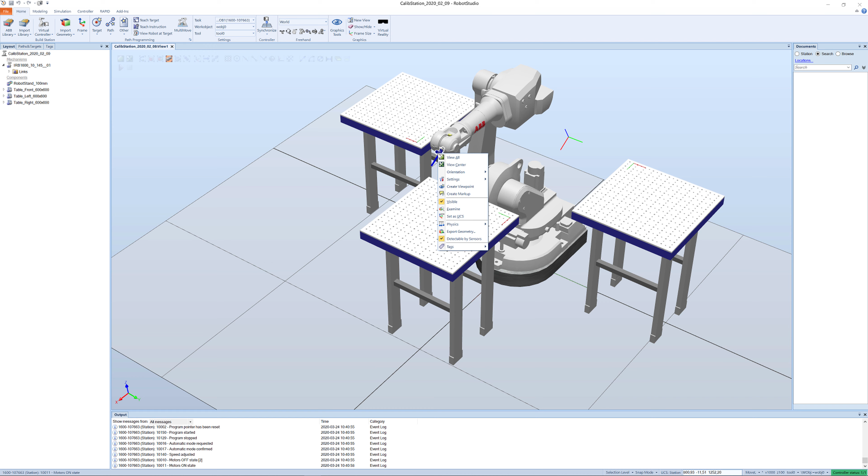Now if I click on this one, right click and choose view center and restore, the way to rotate around this is control, shift and left click to rotate around, control and left click to pan, and the middle mouse wheel to zoom up, down, in, out.

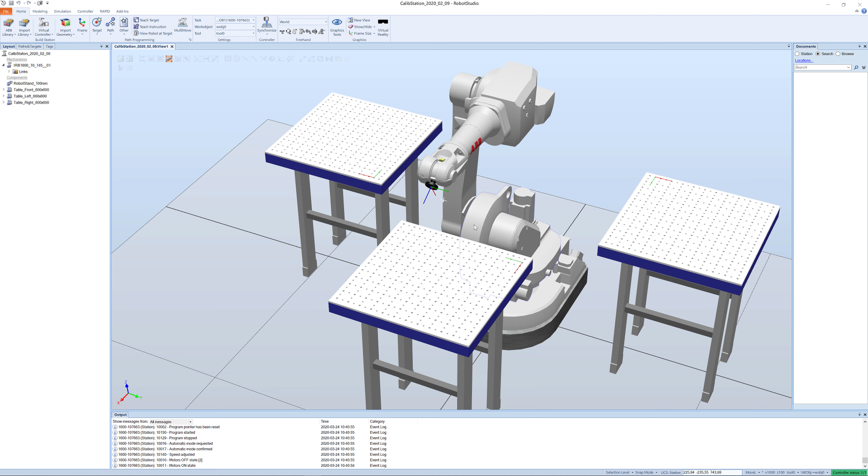So we have 3 tables. We will put a plate on this table, called table left, seen from the robot. So the robot is here, left table, front table, right table. And it has, as you see, a work object located here.

As you see, the green is Y direction, you can notice it here, and the X is red, that direction. We will place a plate at position 125 millimeters in each direction on this one.

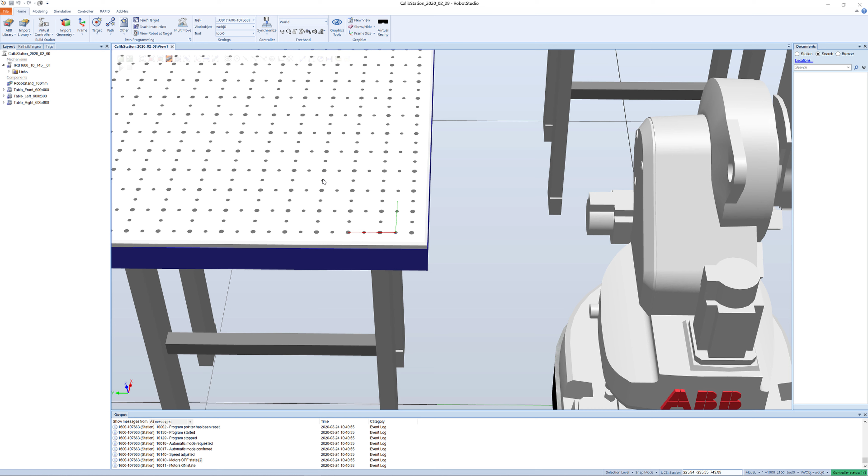So every distance here is 25 millimeters. So 25, 50, 75, 100, 125. So it will be placed at this position.

We populate the station with the other things needed, and you will have access to that and have to download it. We import library objects. In this case I browse my own library, but there will be a calib tool, looks like this one.

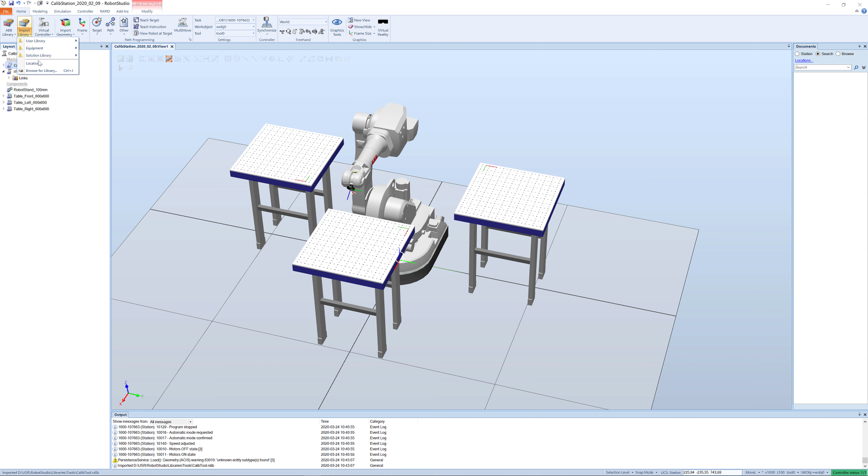And there will be a plate in the library I have here. So here it is, that one, like this.

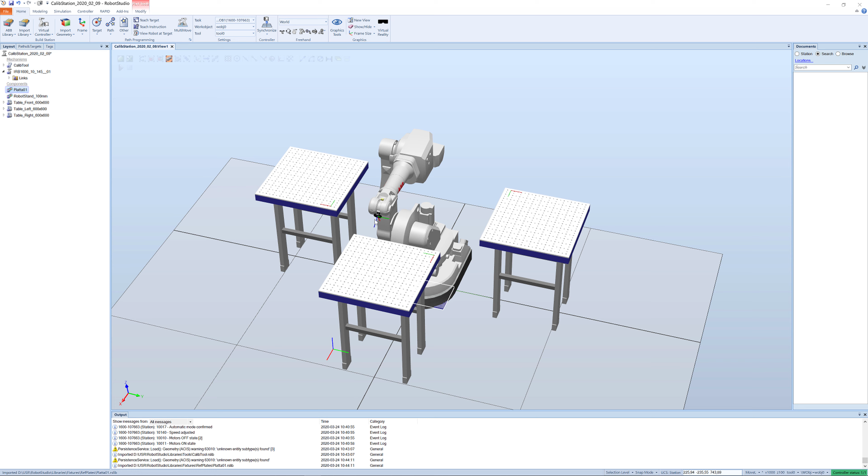Now I just place those at the proper places. So what we have to do first is put the tool at the end flange of the robot. That is done this way: we take the calib tool and drag it to the robot, like that.

And it asks, do you want to update the position of the calib tool? Yes, I would like to do that. Click out here and it will look like this.

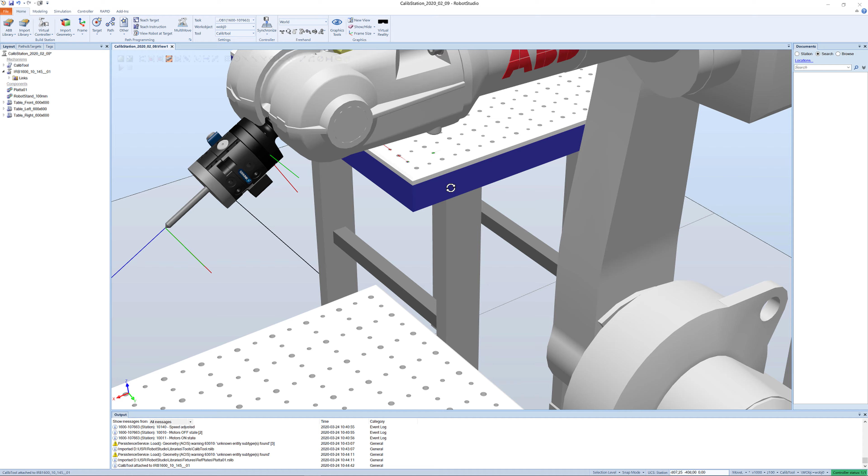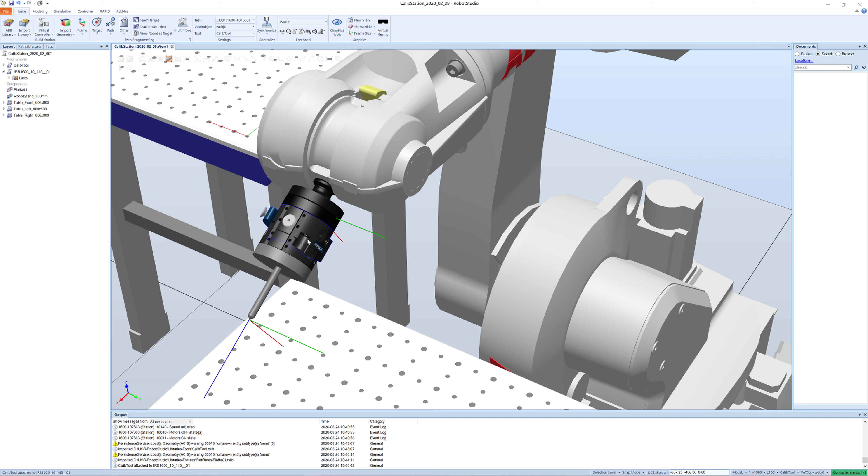So what it has is actually a mounted tool changer system. In practice, when we change the tool, we open this one and disconnect the whole thing, then we can place another tool. But now it is modeled in a way that it connects everything together, though it looks like this in reality as well. That is a tool changer function.

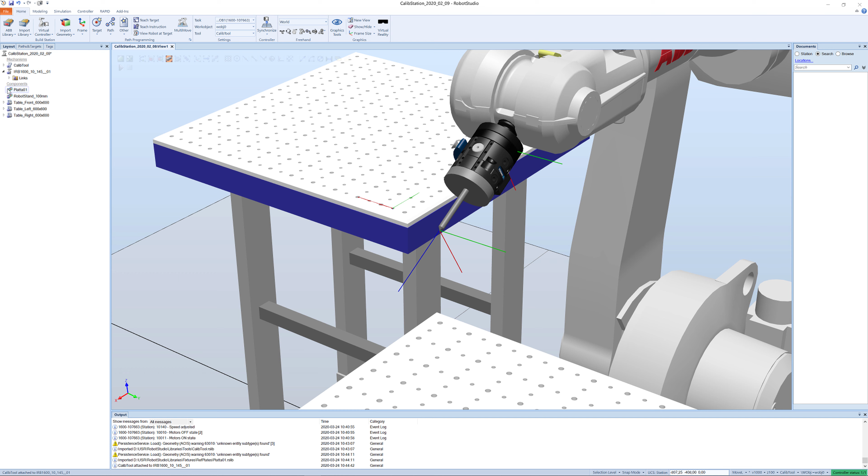We have a tool center point located here, and we have to also place the plate 01 at the proper place. Oh, I missed it totally, so we'll do like this.

Click here, do center. Perfect, now everything is in line again. It works fine. And what we do now is click on that one, right click, and then we make a position.

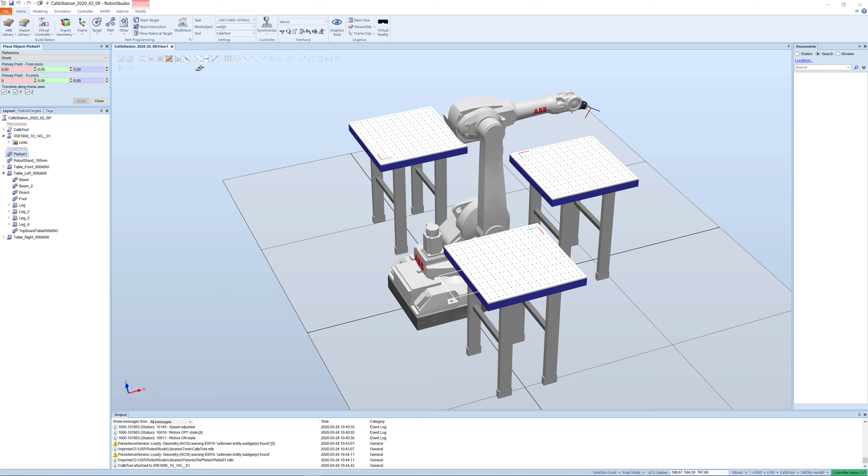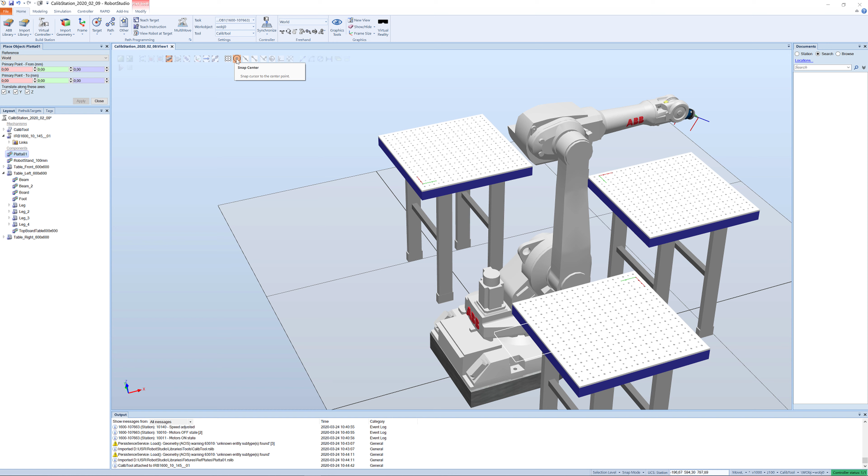Place, one point. So we go from 0 where it is, click on that one. We have to make sure we know what we are clicking on, so to say. In this case we click on snap center, for example, that will be fine. Primary point. Apply, like this.

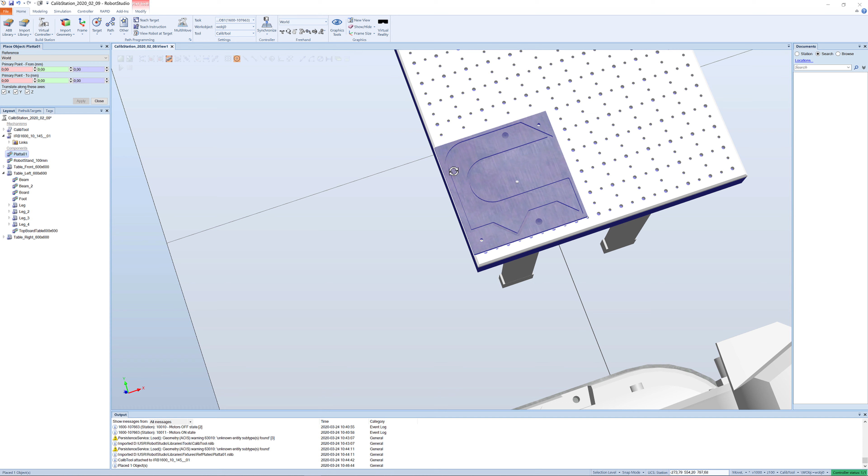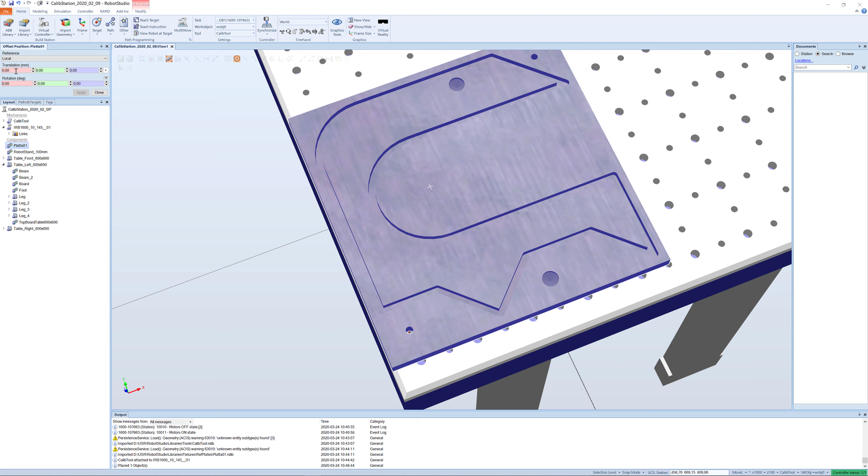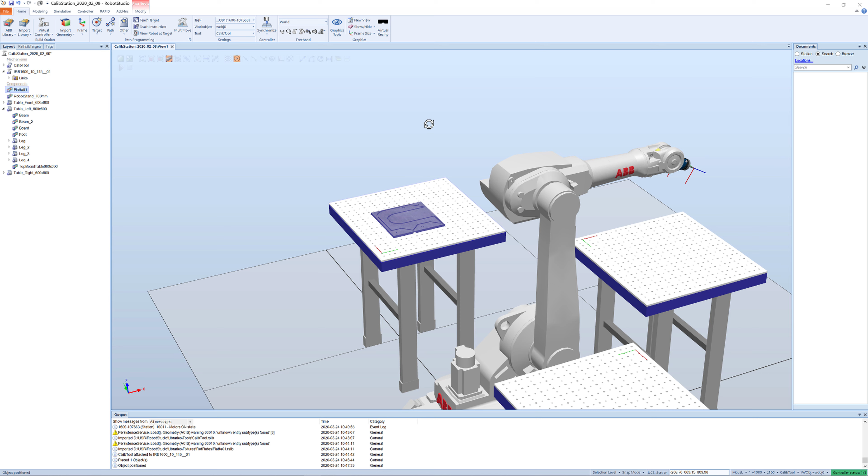And then we move this one now 125, 125, as we said. So we right click on that one, position, offset position, and the reference now should be local, and translation should be 125 and 125 millimeters, like that. Close. So it's fine.

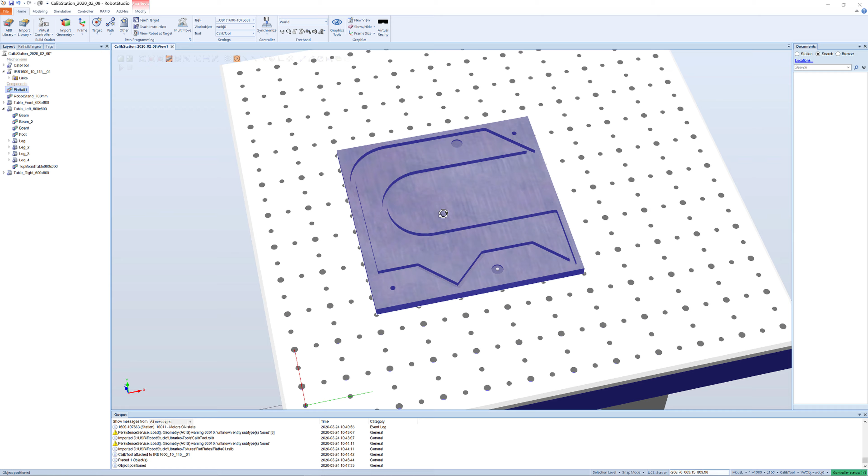And as you see now, we have 50, 100, 125, and 25, 125 here. So that's pretty fine. So now we set up the workstation in a proper way to be able to make a program.

Okay, and that will be continued in the next video.

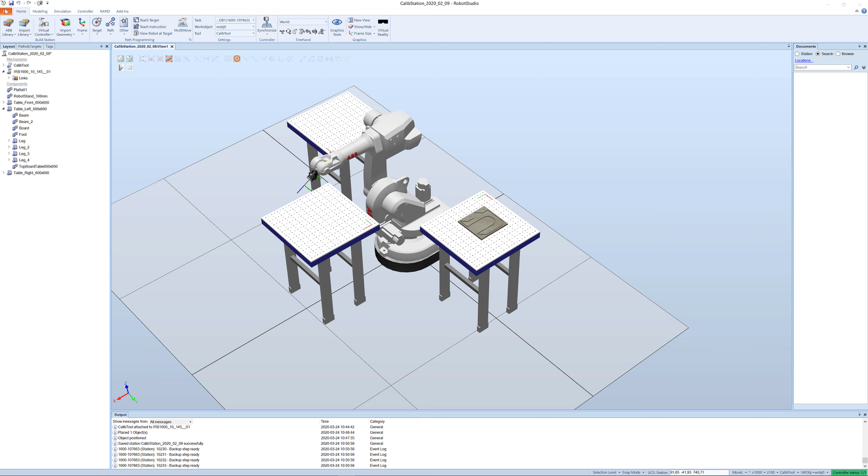Now, before we continue, this could be a good position to actually save what we've done, because this is the station we will work on. Click on File and Save Station As, because it has the name where we unpacked the station before, so we change the name to something else, which could be what we call it, Exercise 1 underscore 2020, like that. Okay, good. Then we'll continue later on.